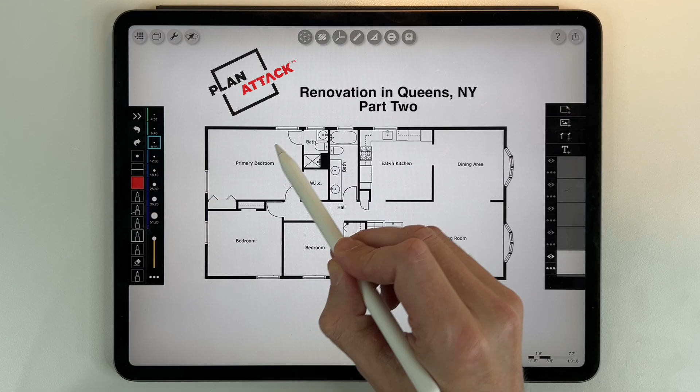This is part 2 of our 2-part series where we're optimizing the floor plan of this 1,335 square foot or 124 square meter 3-bedroom house, which is in Howard Beach in Queens, New York. Now this floor plan was submitted to me by Syed. He is undertaking a renovation of this house because it was built in the 70s and it hasn't been updated.

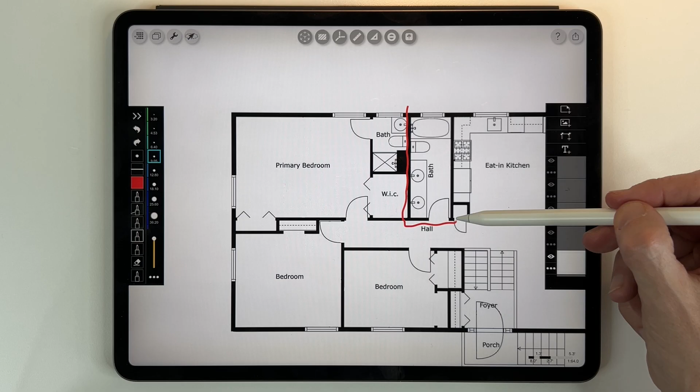In the last episode, we worked on the kitchen, living, and dining area. Today, we are going to focus on the primary bedroom, the ensuite, and the walk-in closet. So let's have a look at the floor plan. Now, I just want to point out that I've decided that the main bathroom, which is the family bathroom, is going to stay with the same layout. However, it is going to be updated because the fixtures and finishes are dated, but there is nothing wrong with that layout. So let's turn our attention to the primary bedroom and pick out all the problems.

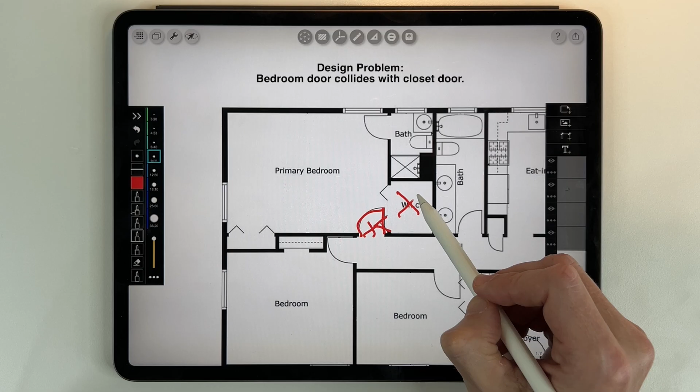Well, problem one is you have a door collision right away when you walk in. The door collides with the bifold door for the walk-in closet. The walk-in closet is not very efficient. It's basically a stand-in closet. You don't have 2 feet of depth on all 3 sides, so it's not a great walk-in closet. If you have the bifold door open, you're going to damage the back of your main door. The bathroom itself is okay, but the counter is tiny. I don't like the outswing door because it's going to limit furniture placement.

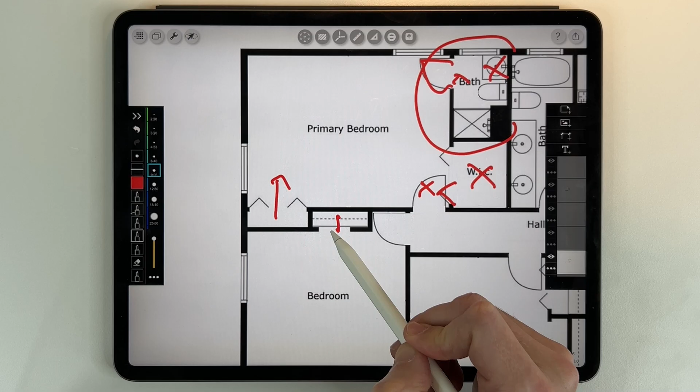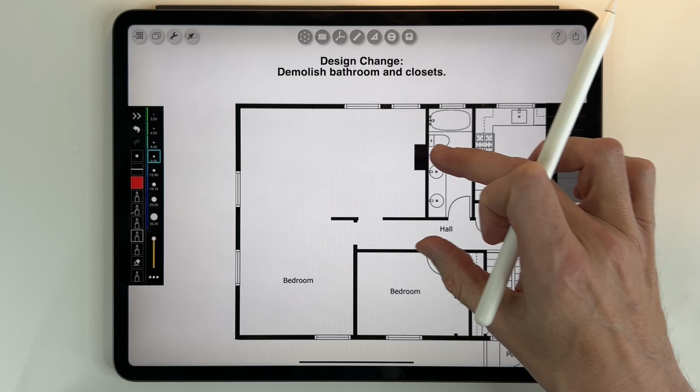And then there's an issue on the other side. We've got another closet that faces into the room, but the closet for bedroom 2 is not deep enough. It's only about 18 inches deep, so you can't really hang clothes in it. I think this all needs to be reworked as well. So let's have a look at what I'm going to suggest for the demolition plan. I'm going to suggest we take out the entire ensuite and closet, as well as start to take apart the wall between the 2 bedrooms. And maybe, just maybe, we're going to be able to distribute this back in a more decent way. So let's have a look.

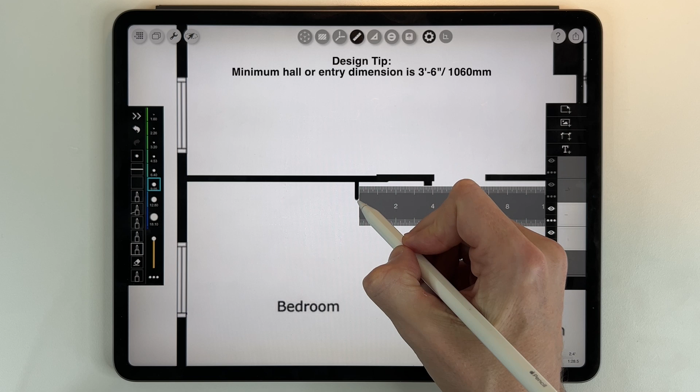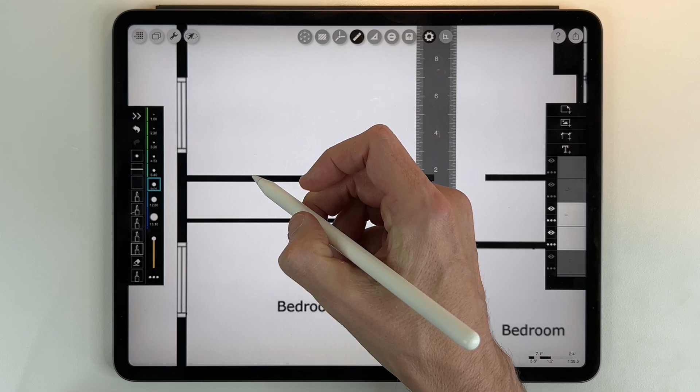Let's start with the dividing wall between the 2 bedrooms. And this is what I'm going to suggest. I'm going to suggest that we just continue that wall all the way along. Now, I would like to have a better entry, and we really do need 3'6", which is 1.06 meters. That is my standard recommended hallway width when you walk into a room, and we didn't have that before. And then we need to make sure we have 2 feet of depth for the closet, which is 0.6 meters. So our closet is going to end up looking something like this. And you can decide whether both closets go into bedroom 2 or maybe one closet goes into the primary bedroom. You can figure that out.

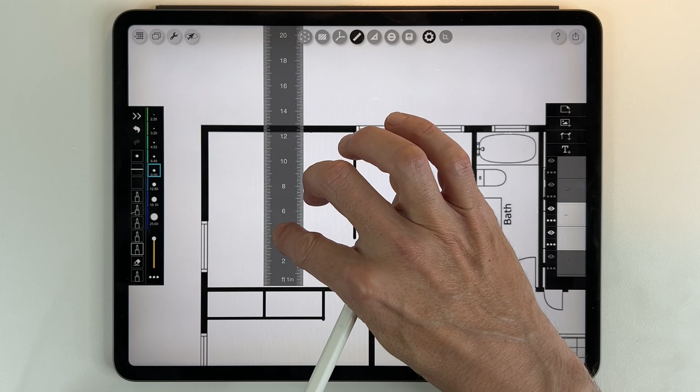Now, how are we going to subdivide this and make it into a primary bedroom plus a nice ensuite plus a walk-in closet? Well, the plan kind of tells us already what it wants to do. We know that if we put the dividing wall here, that we don't have enough space here for a walk-in closet and a bathroom. That was the problem we had before. If we put the dividing wall here, interestingly enough, we will have 11'6", which is 3.5 meters, and we will have over 12 feet, which is 3.66 meters. So we've got a good size primary bedroom.

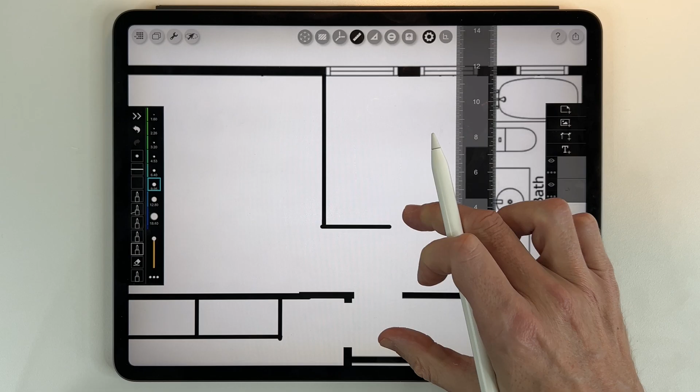Now, it's also going to tell us in plan what we need to do to finish the walls, because remember, we needed that 3'6" or 1.06 meters as our hallway depth. So I'm just going to draw that line right here because that is the 3'6". So that tells us that we need that wall to be that distance. And then we also know, I'm just going to draw it across here, that we're going to have another wall here. So this kind of tells us how the layout for the bathroom and the walk-in closet is going to be.

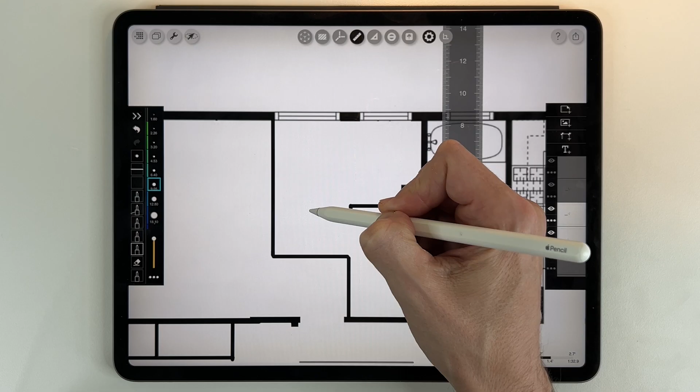Now, interestingly enough, we've got this space here, and ideally, this might be the walk-in closet if we drew the wall, something like that. We could also make a kind of vestibule entrance so that you come into the bathroom through this vestibule. Maybe there's another cabinet here. And I think this is a good size for the ensuite bathroom. So if I was to draw this out now with proper walls, you can see what I've done. You walk into this main bedroom. I divided the closet into 2 closets because that's quite a span for doors.

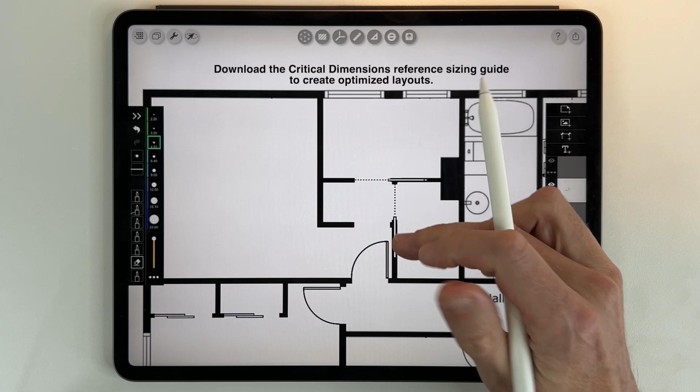Then you can walk into the primary bedroom, into this vestibule area, which I always like a vestibule in the primary bedroom. It's kind of hotel-like because then you go into the closet and the bathroom. So the bathroom is the whole top area. We've got a bit of storage here and a nice closet. So if I was to draw this in now properly with the fixtures, I would put the toilet here, which is almost where it was originally.

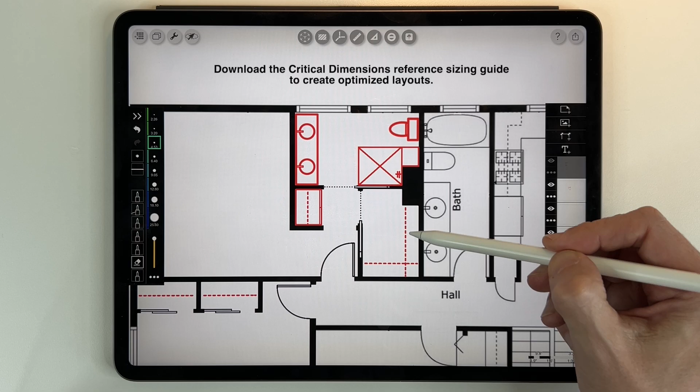I'd put a double vanity on the opposite side, a big glass shower, maybe with a bench, and a cabinet for some extra storage, maybe extra closet or linen storage. And then we've got a walk-in closet using this bump. This is the perfect depth for hanging, so we have good hanging on both sides. So this is how I would detail this, and then we can add the beds in. So I would have a king bed here and maybe a queen bed in bedroom 2.

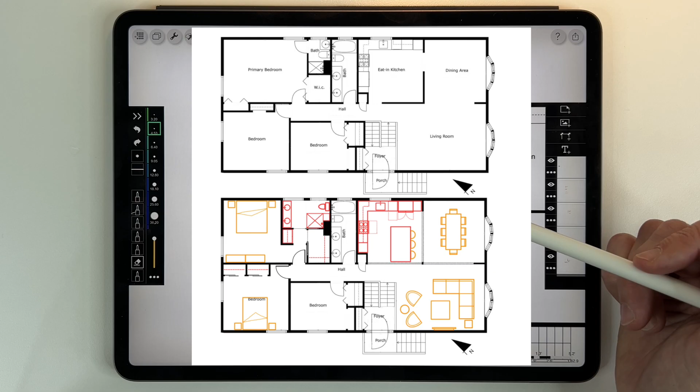So I would like to hear what you guys think about the layout for this house, and I'd like to now show you the before and after of both sections of the house, so the living, dining, kitchen, plus the ensuite, walk-in closet, and primary bedroom, and have a look, study the plans, and let me know what you think about the changes.